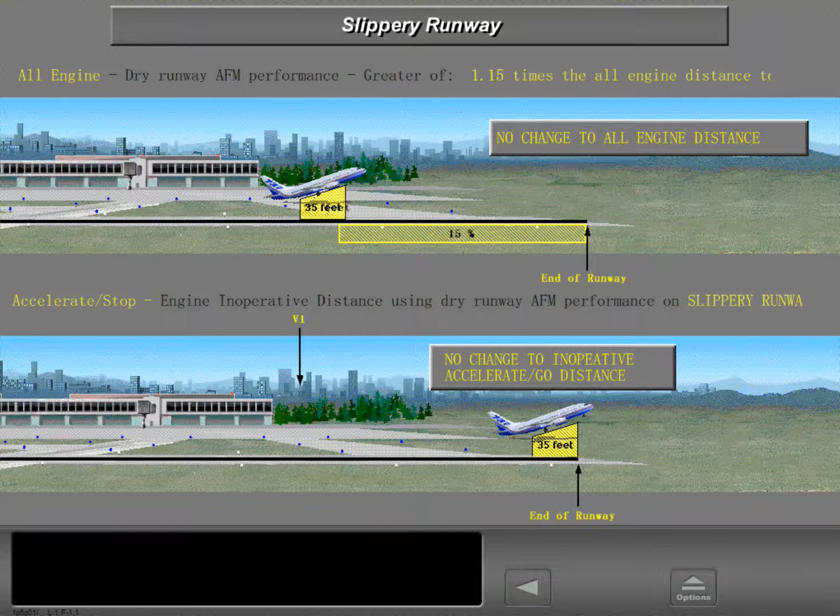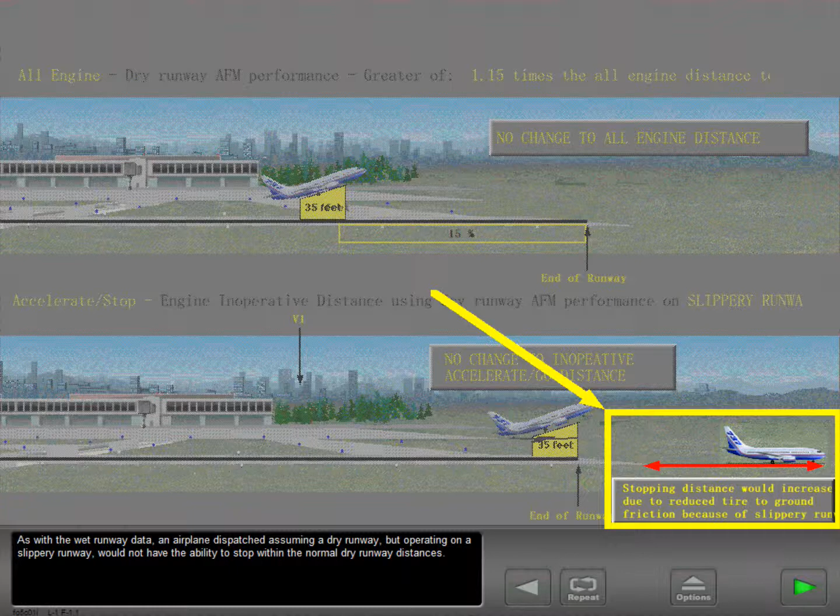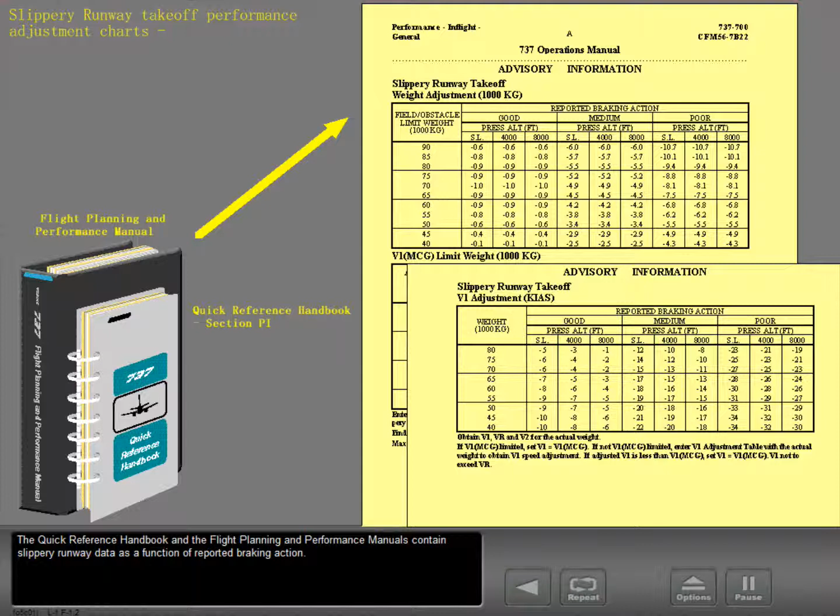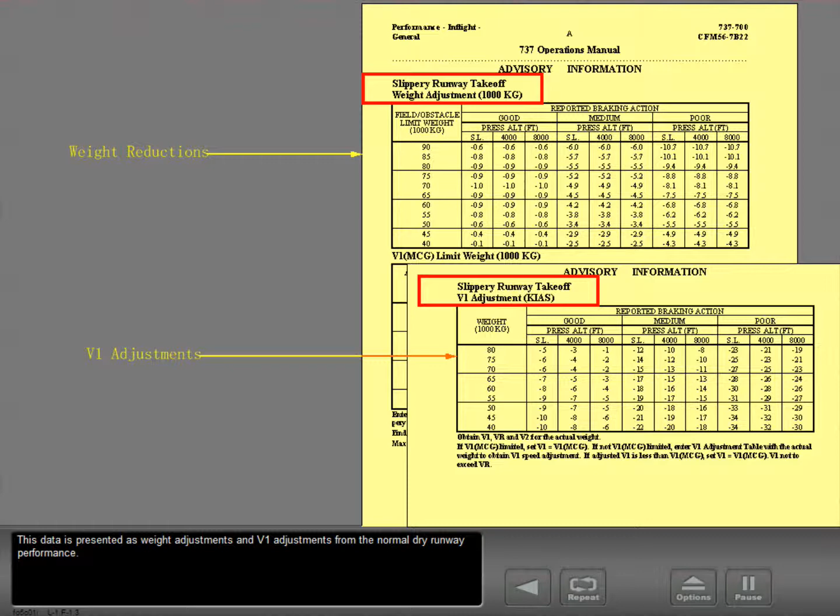As with the wet runway data, an airplane dispatched assuming a dry runway but operating on a slippery runway would not have the ability to stop within the normal dry runway distances. The Quick Reference Handbook and the Flight Planning and Performance Manuals contain slippery runway data as a function of reported braking action. This data is presented as weight adjustments and V1 adjustments from the normal dry runway performance. V1 MCG limit weights are also presented.

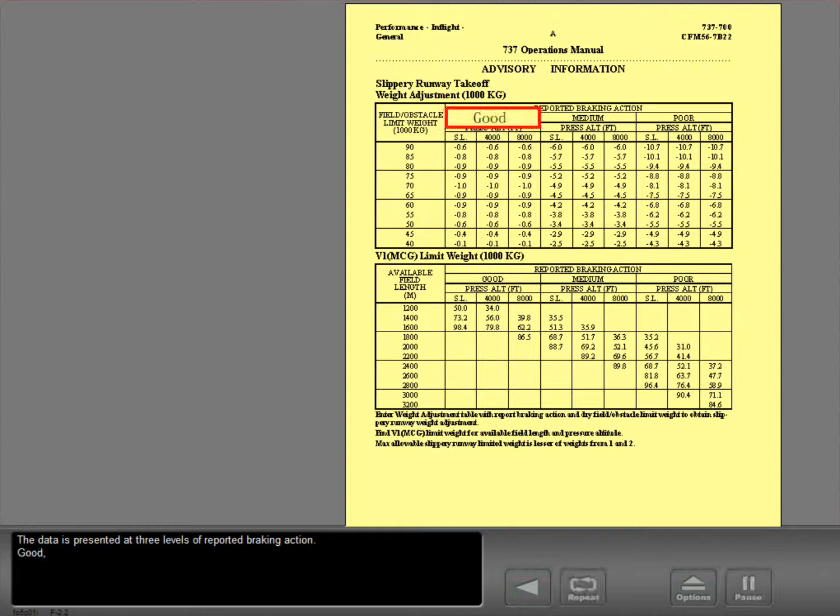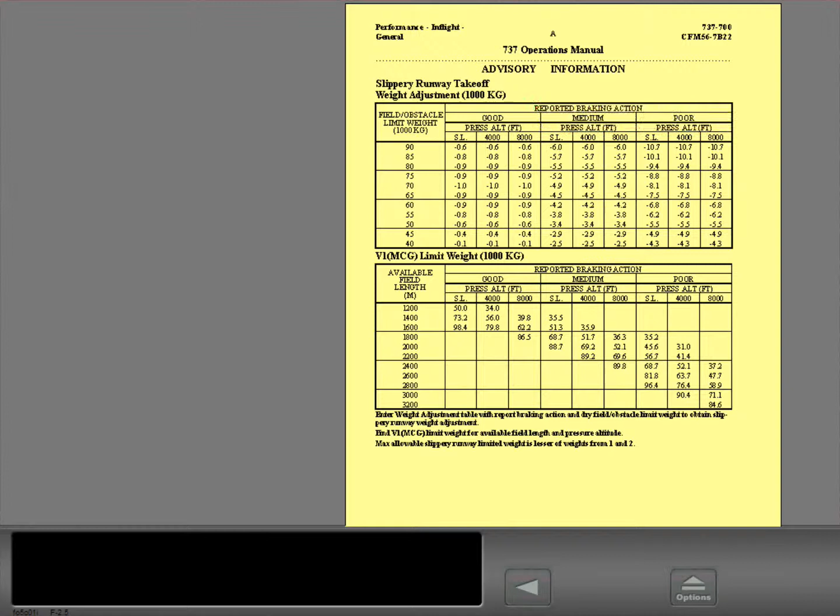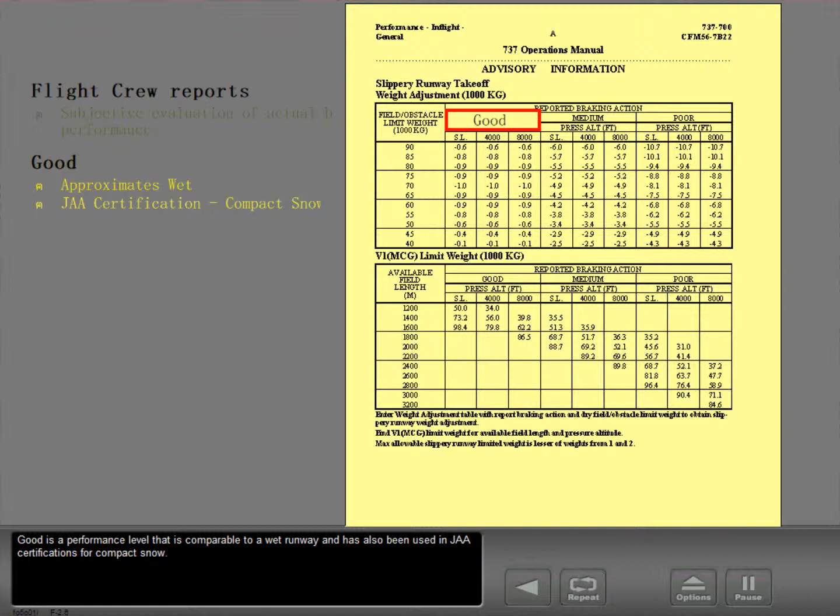The data is presented at 3 levels of reported braking action: good, medium, and poor. This reported braking action is based upon subjective evaluation of actual braking performance as reported by flight crews. Good is a performance level that is comparable to a wet runway and has also been used in JAA certifications for compact snow. Poor is a performance level that is used in JAA certifications for wet melting ice.

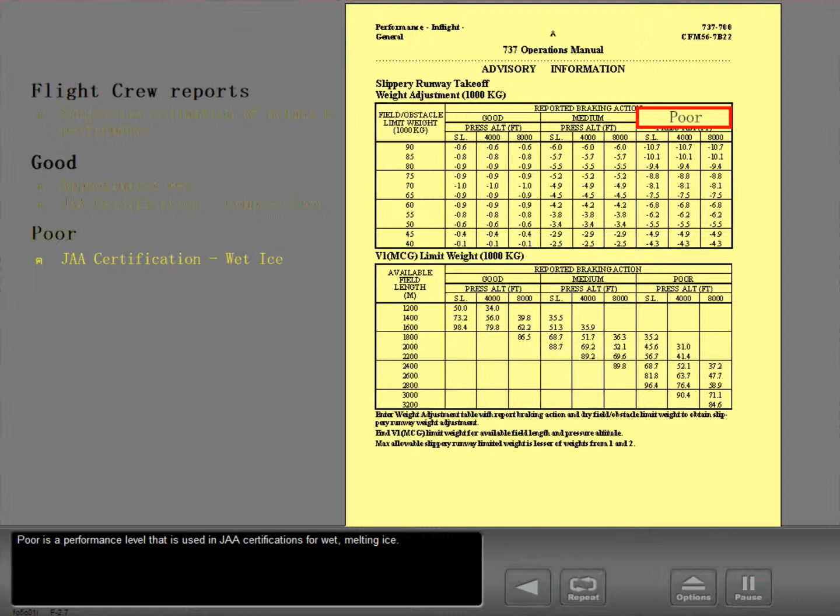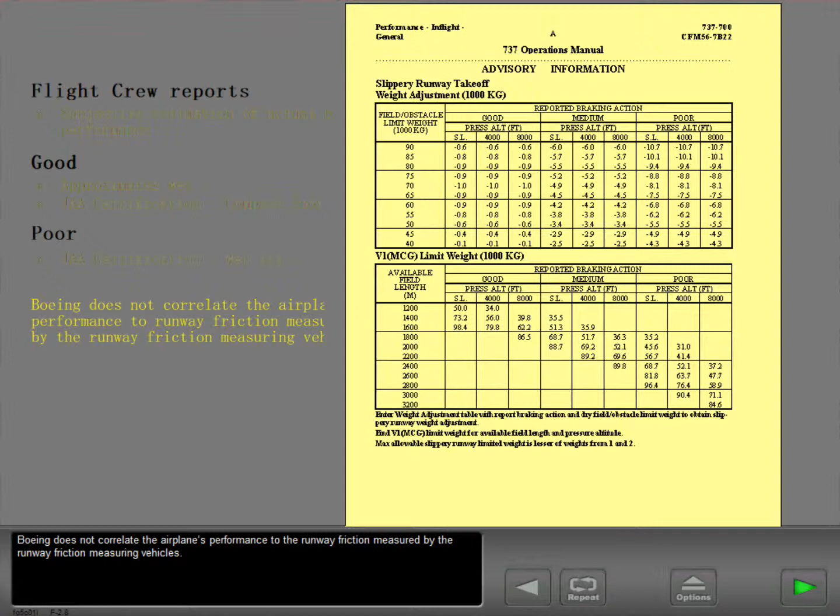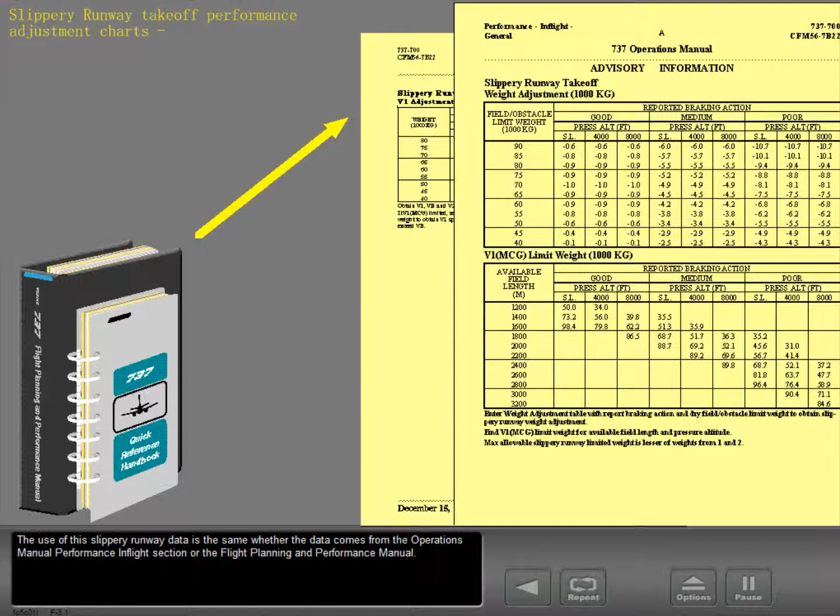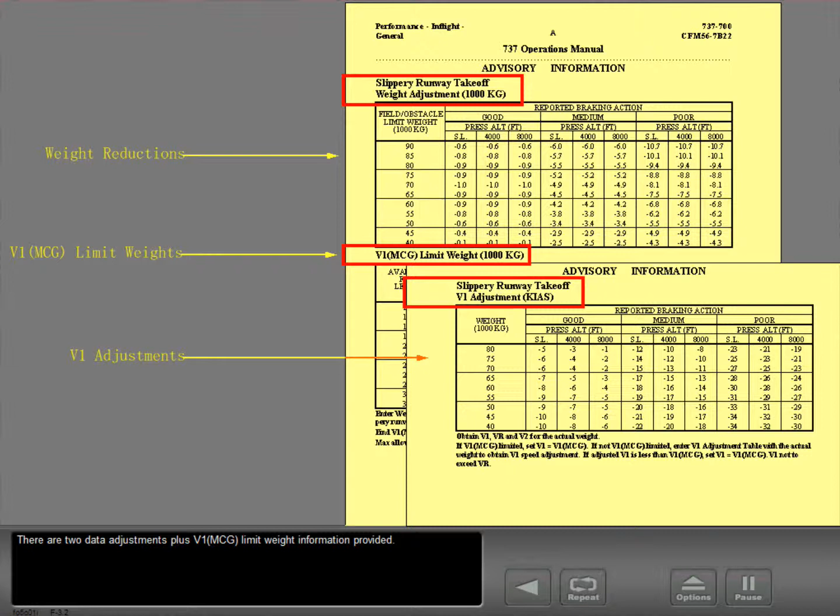Boeing does not correlate the airplane's performance to the runway friction measured by the runway friction measuring vehicles. The use of this slippery runway data is the same whether the data comes from the Operations Manual Performance In-Flight section or the Flight Planning and Performance Manual. There are 2 data adjustments plus V1 MCG limit weight information provided. The data adjustments are to takeoff weight and V1 speed.

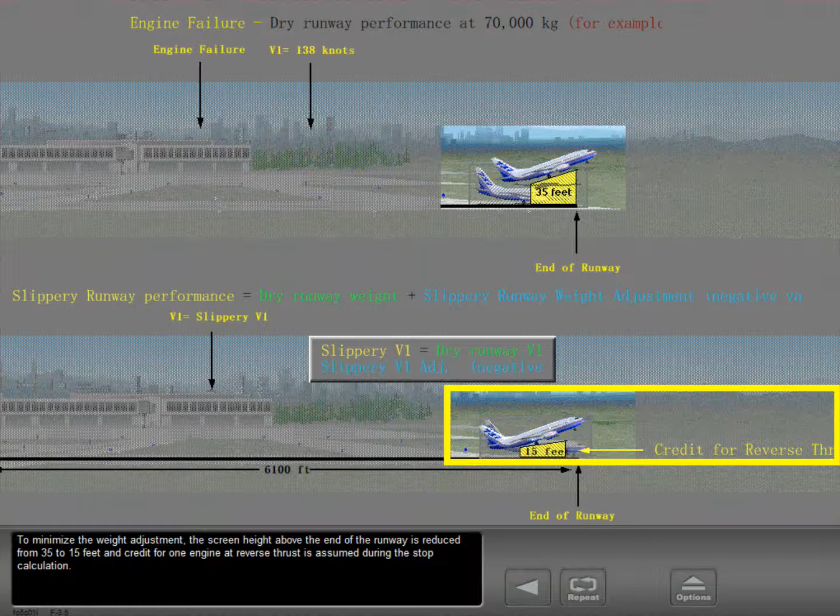These adjustments represent how much the takeoff weight must be reduced and the V1 adjusted so that the distance required for accelerate go and accelerate stop does not change. To minimize the weight adjustment, the screen height above the end of the runway is reduced from 35 to 15 feet, and credit for one engine at reverse thrust is assumed during the stop calculation. The V1 MCG limit weight is the maximum weight at which the airplane can accelerate to V1 MCG speed and still stop within the field length available for the reported braking action.

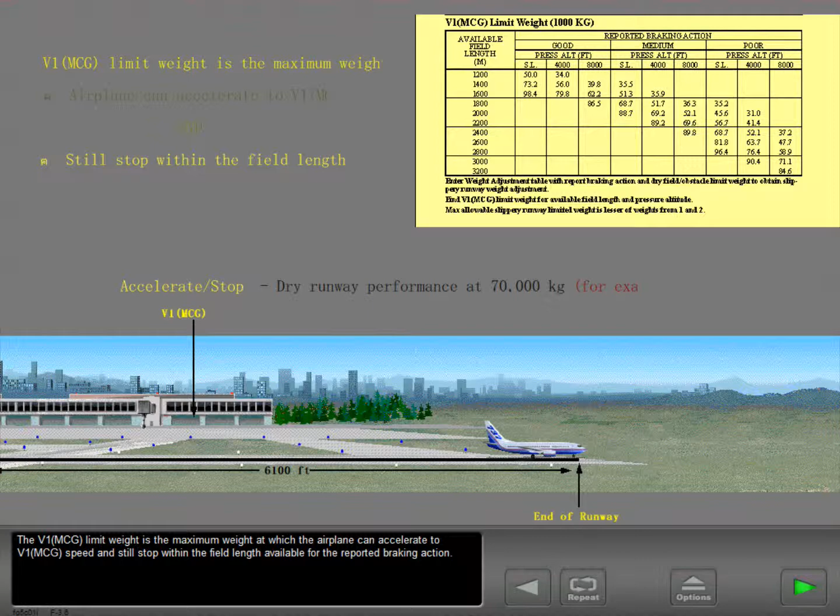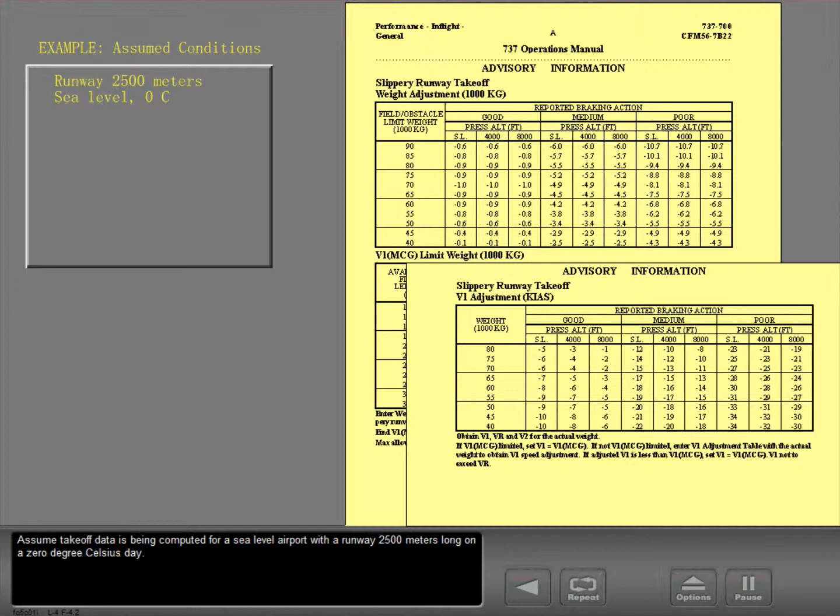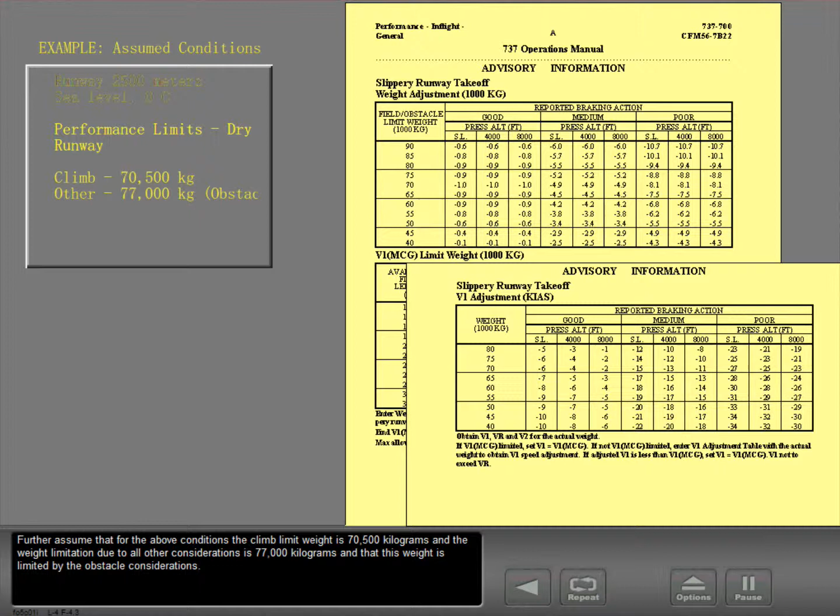An example will be used to show how slippery runway data adjustments are applied. Assume takeoff data is being computed for a sea-level airport with a runway 2,500 meters long on a 0°C day. Further assume that for the above conditions, the climb limit weight is 70,500 kilograms and the weight limitation due to all other considerations is 77,000 kilograms, and that this weight is limited by the obstacle considerations. Finally, we will assume a reported braking action of medium.

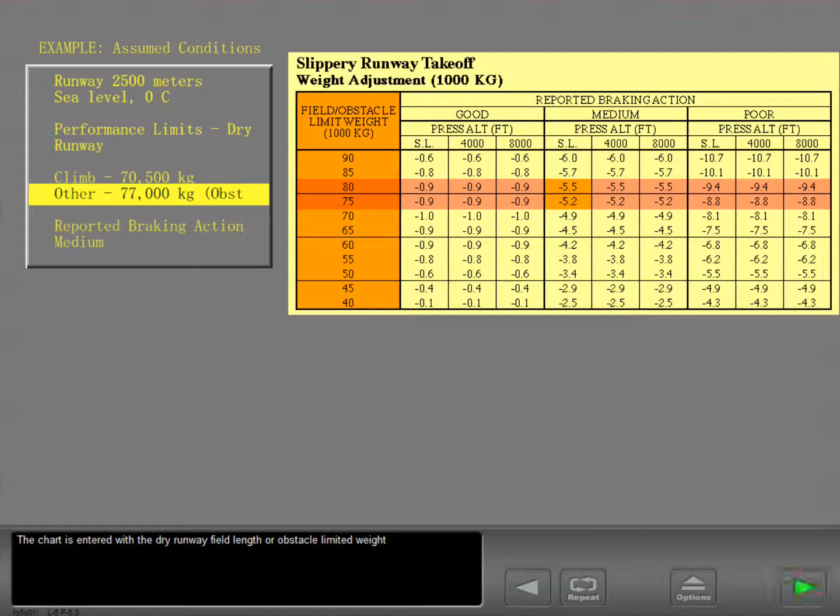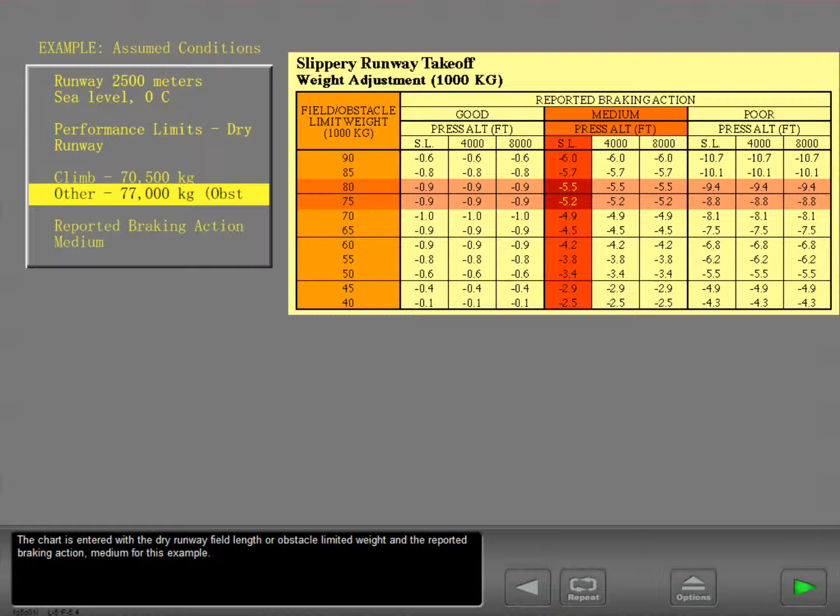First, we will look up the weight adjustment. This weight adjustment is added to the normal dry runway field length or obstacle limited weight. This weight adjustment is always negative. The chart is entered with the dry runway field length or obstacle limited weight and the reported braking action, medium for this example. Interpolate to obtain the takeoff weight adjustment. Add this negative weight adjustment to the lower of the dry runway field length or obstacle limited weight.

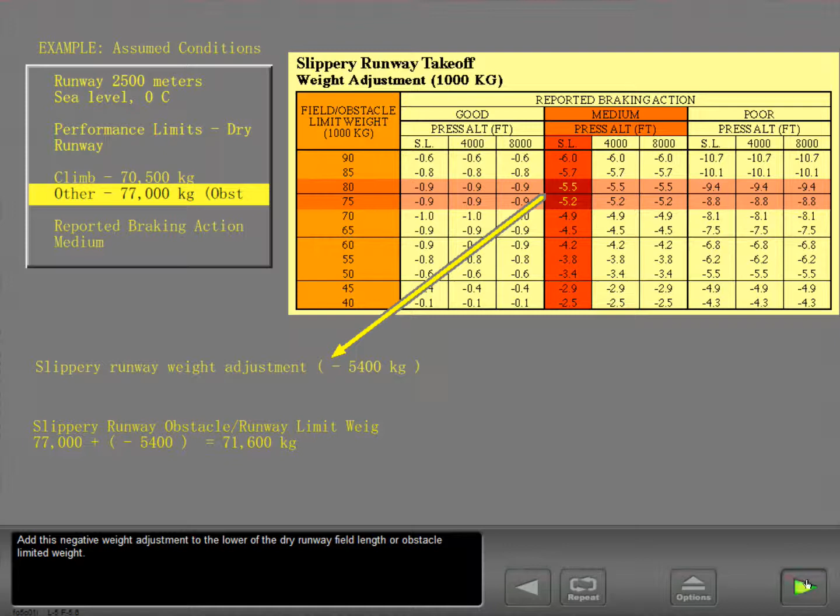Next, we need to determine the V1 MCG limited weight and compare it to the obstacle or runway limited weight just determined. We start by entering the V1 MCG limit weight table with the field length available, go across to the column which lists the pressure altitude and reported braking action and determine the V1 MCG limit weight. In this example, the V1 MCG limit weight would exceed 88,700 kilograms, the highest value in the table.

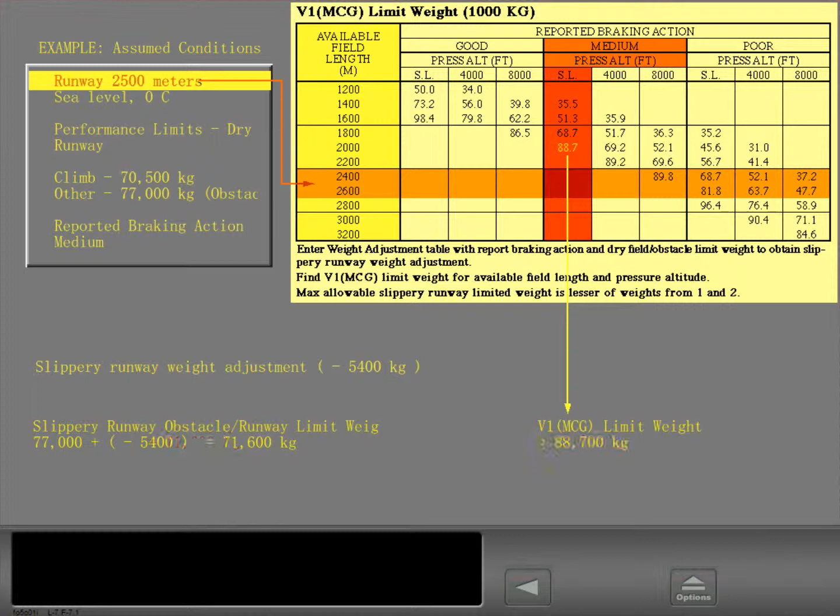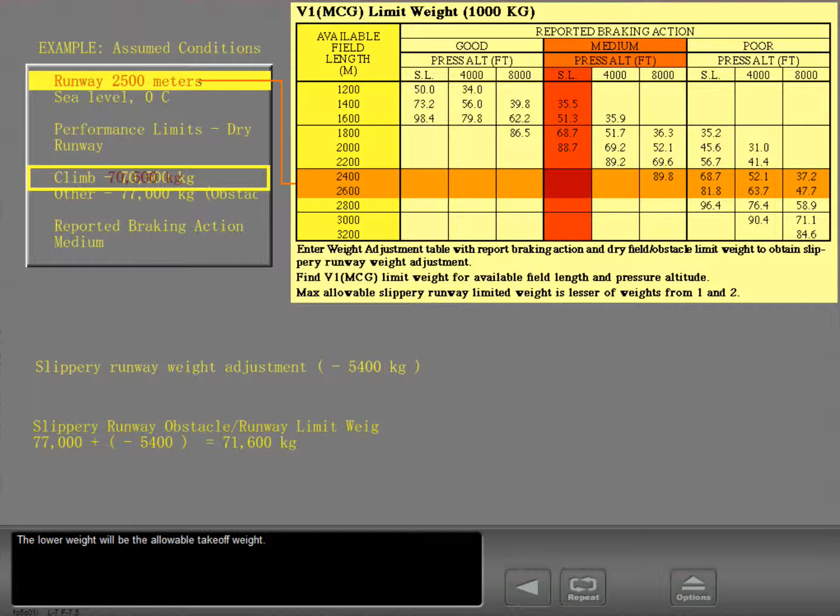Compare the V1 MCG limit weight and the field obstacle adjusted weight. The lower weight is the slippery runway takeoff weight due to runway considerations. In this case, the V1 MCG limited weight is not limiting. The climb limited takeoff weight must be compared to the slippery runway limited takeoff weight. The lower weight will be the allowable takeoff weight. For this example, the climb limit weight is still the most limiting.

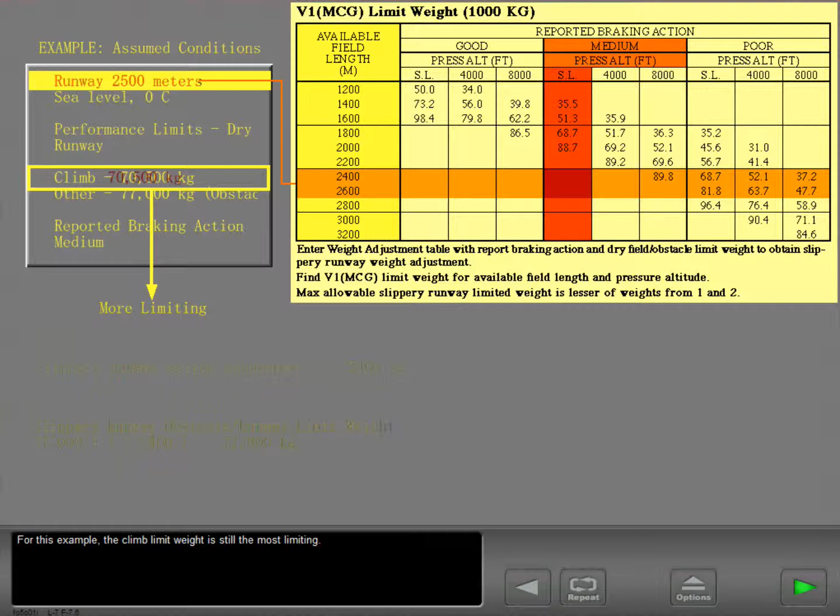Next, the V1 speed must be computed. For this example, assume that the takeoff will be performed at the climb limit weight of 70,500 kilograms. Please recall that for this example, the climb limit weight is less than the slippery runway obstacle or runway limit weight. The first step is to obtain the normal dry runway takeoff speeds for the planned takeoff weight. These speeds can come from the Performance In-Flight section of the QRH or from the FMC.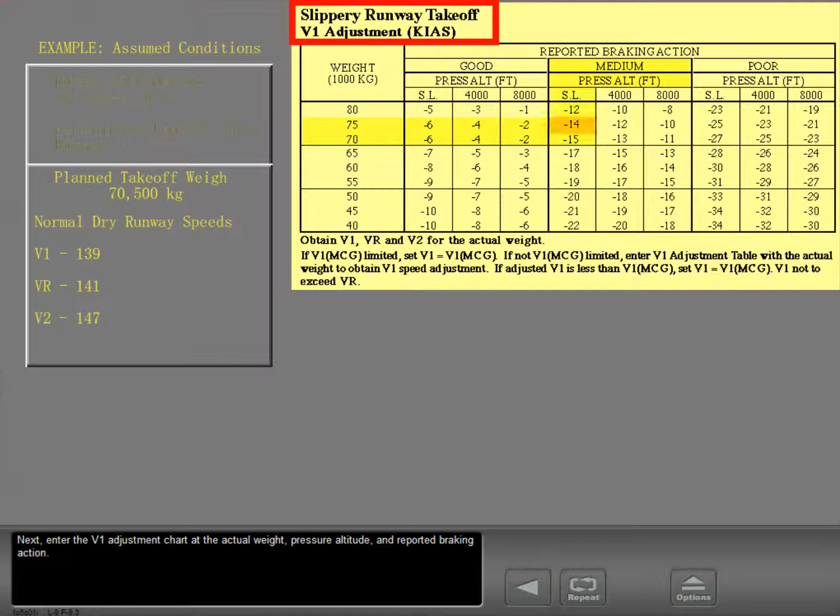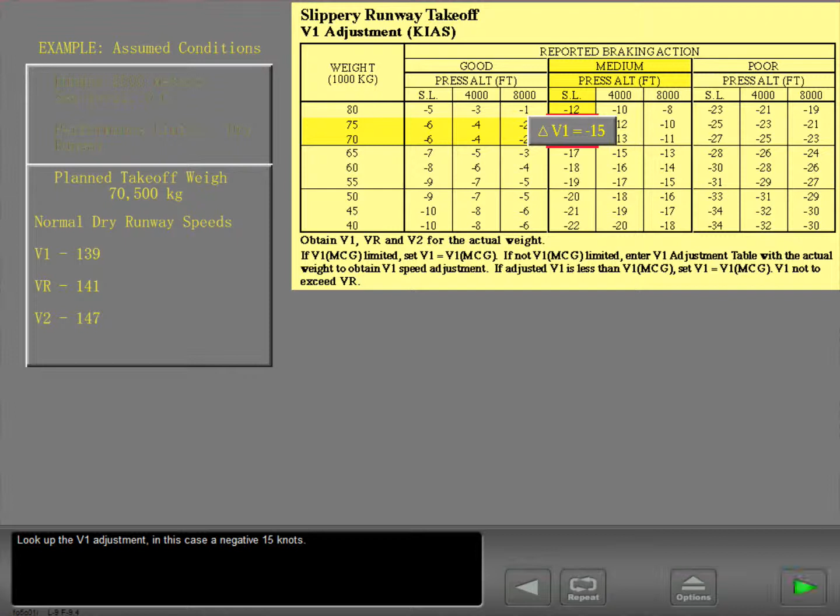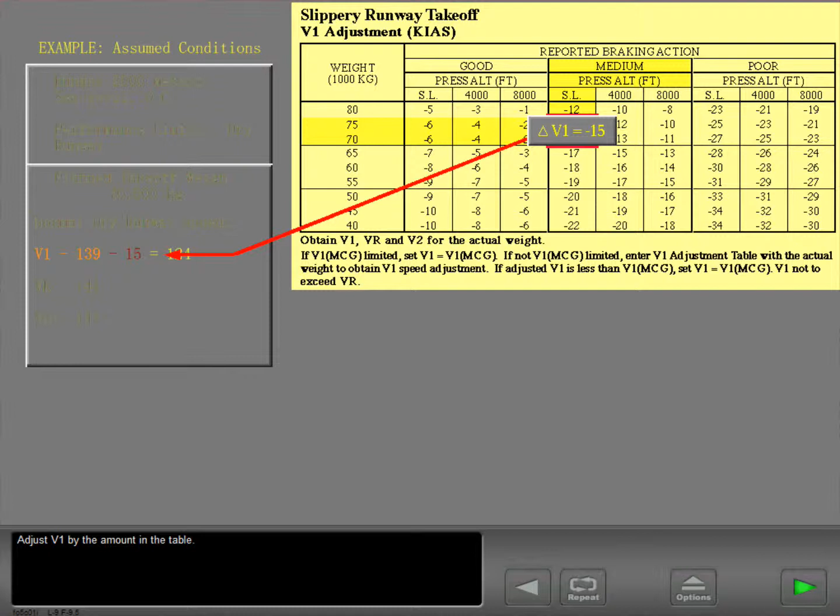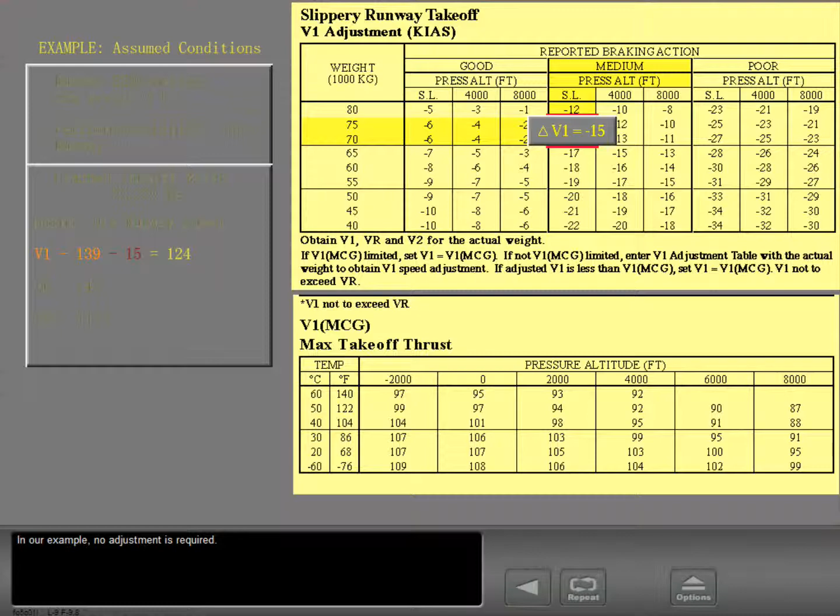Next, enter the V1 adjustment chart at the actual weight, pressure altitude, and reported braking action. Look up the V1 adjustment, in this case a negative 15 knots. Adjust V1 by the amount in the table. Compare the resulting V1 to V1 MCG obtained from the QRH. If the resulting V1 is less than V1 MCG, set V1 to V1 MCG. In our example, no adjustment is required. Finally, the slippery runway V1 would be entered into the FMC.

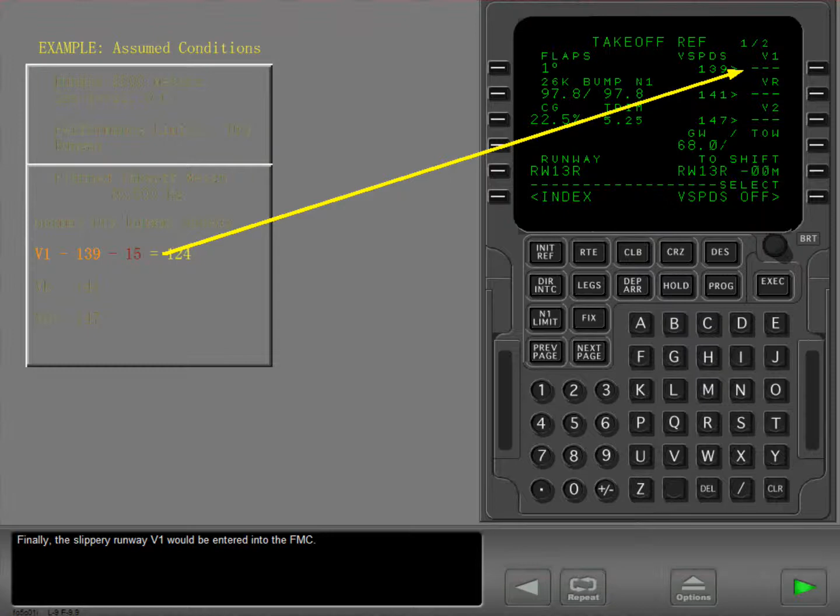The slippery runway takeoff weight and V1 speed computed using the described method will result in the same takeoff distance as required by the original dry runway weight. The difference is that at this reduced weight and V1 speed, the airplane will reach a screen height of 15 feet instead of 35 feet following an engine failure at the critical speed. The airplane should also be able to stop on a slippery runway with reduced braking action if maximum manual braking and at least one engine reverse thrust is used. Notice that the weight and V1 adjustments are much larger at reported braking actions of poor. The slippery runway adjustments are valid for all flap settings.